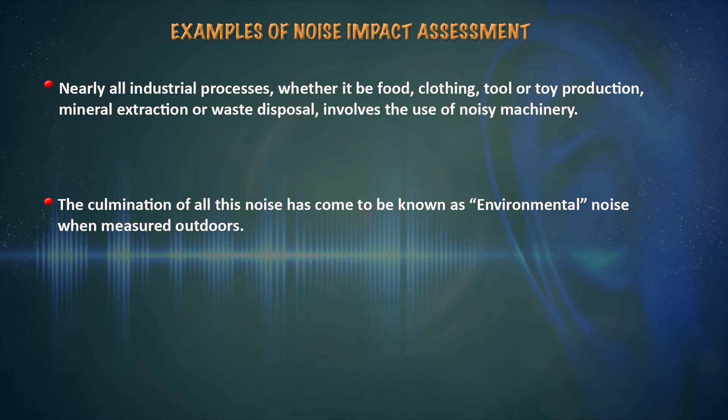Nearly all industrial processes, whether food, clothing, tool or toy production, mineral extraction, or waste disposal, can involve noisy machinery. So all this noise has come to be known as environmental noise, and this is measured outdoors. Indoors also, in the industrial sector, we can have indoor noise. By implication, noise is any sound that is created but is unwelcome; because music is soft to your ear, we cannot categorize that as noise.

Noise is something which is unpleasant to your ear and which is actually hampering your hearing. That could be a rock concert, a local factory, an airport, or a road, and all this has an impact and may need certain monitoring and control measures. This is basically the essence of noise impact assessment. Measurement of noise and noise units is normally done in any impact assessment study.

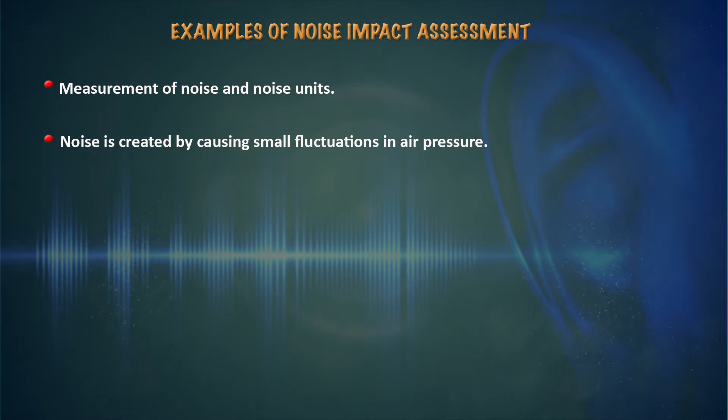Noise is created by small fluctuations in air pressure, and these fluctuations are generally caused by vibrating surfaces. An obvious and common example of this is a loudspeaker. This generates sound intentionally, and by these means, in political rallies, at Diwali time, even when people want to put something on sale, they use loudspeakers and go on the roads. I am specifically giving a context in our country, that is India.

So the level of these fluctuations can be large, because some of them may have very loud voices. They may be playing songs at very high levels, which can be damaging to the ears. And the elderly and young children are vulnerable because their eardrums would be affected.

This can cause instant hearing damage, which can be temporary or permanent. The human ear is a very sophisticated sensing instrument that allows us to hear all the sounds useful to us, but it can be damaged by very high sound levels.

A good quality noise impact assessment will determine the existing baseline noise at a proposed development site. If a new building is proposed, how do we estimate the impact of the noise it will create? First, you estimate the existing baseline noise at the site, then look at the technologies to be employed, and predict the level of impact the new proposal will have on the existing noise climate.

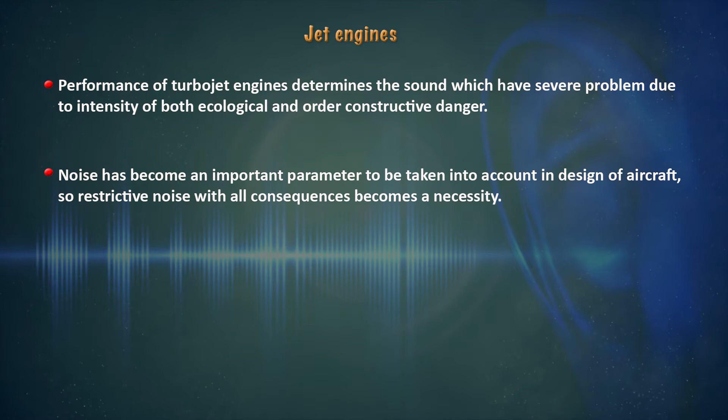For jet engines, the performance of a turbojet engine determines sound that poses a severe problem due to the intensity of both ecological and constructive dangers. Noise has become an important parameter to account for in aircraft design, so that they can be silenced to the extent possible, making restrictive noise control with all its consequences a necessity.

Aircraft noise from turbojet engines has major causes, including the mixing of exhaust gases with ambient air, pulsations in the fuel system that produce variation in blade output speed, density jumps during supersonic flight where airflow interacts with engine exhaust, turbulent jet flow generating noise, and blade vibrations causing disturbances in airflow and gas. In general, all types of noise created by aircraft are monitored so they can be silenced as much as possible.

The principle of operation depends on the chemical transformation of the potential energy of fuel into mechanical energy in aircraft engines. The operation consists of aspiration of atmospheric air through an intake device, compressing the air with a compressor, mixing air in a combustion chamber, expanding gases through the combustion turbine, and expanding gases in the outlet device.

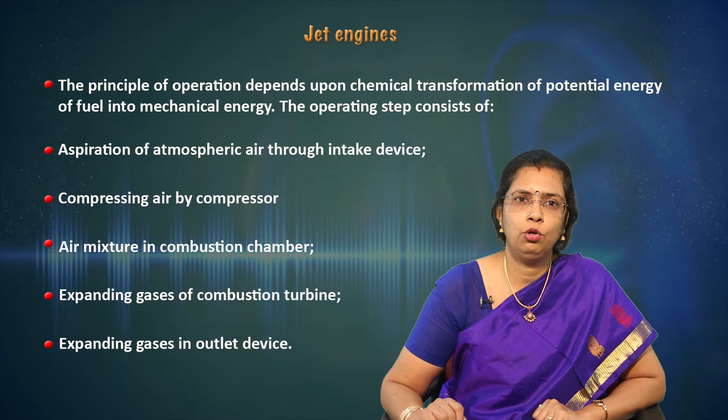All this will create noise in the process, noise in commercial and public buildings. Noise can be created by construction work and it can include demolition work, site preparation work, and building maintenance or repair.

You have often seen that when fixing pavement tiles, or the new type of granite or marble, when renovating buildings, houses or offices, the sound from the tile cutting machine is so shrill and annoying that it can actually cause damage. So the people cutting those tiles need to wear ear mufflers to protect their ears.

Then there is the operation of vehicles within or leaving the construction site. For example, to put the lintel or the ceiling of construction places, you require mixing machines where the cement, sand, gravel and all that is mixed equally, and then those machines lay that. So all this creates a lot of sound.

So the activities carried out near the immediate vicinity of the construction site, the citizens staying there, and those people executing the work at the site - all the impacts here have to be taken into account at the work site.

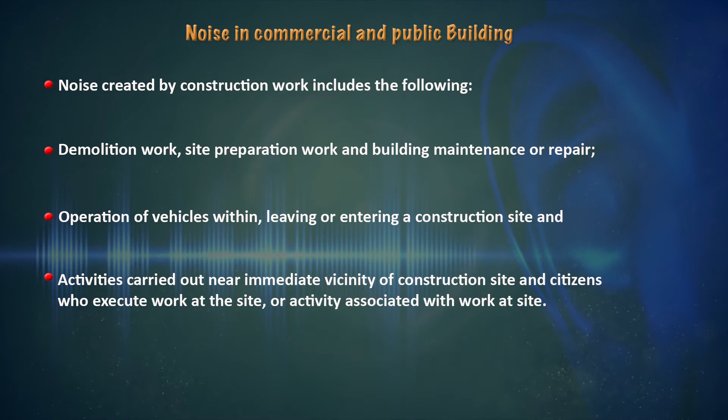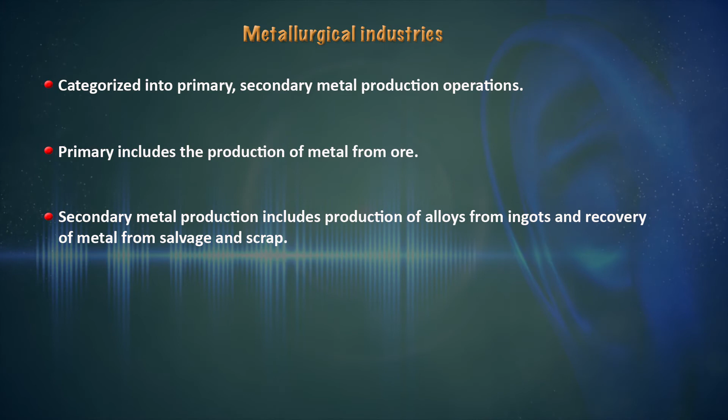In the same way, metallurgical industries and ceramic industries can be categorized as primary, secondary metal production processes. Primary means the production of metal from the ore. Secondary includes production of alloys from the ingots and recovery of metal from salvage and scrap.

Power system includes the vehicle and vehicle speed. Non-power system includes car horns, etc. So attenuation of noise in the industry is difficult because the machines and the enclosures are diverse in nature, and the acoustic characterization is not as simple as we think.

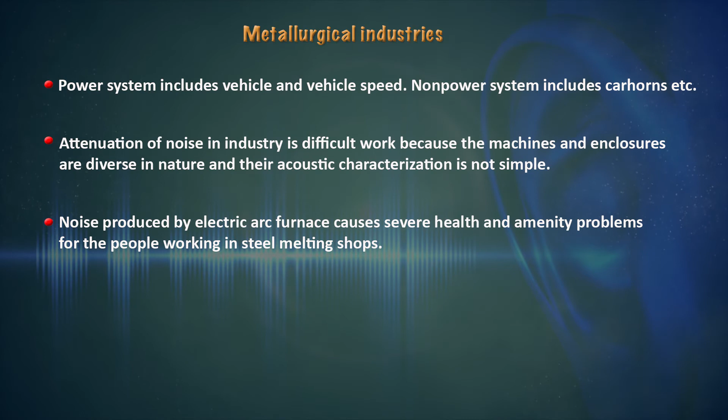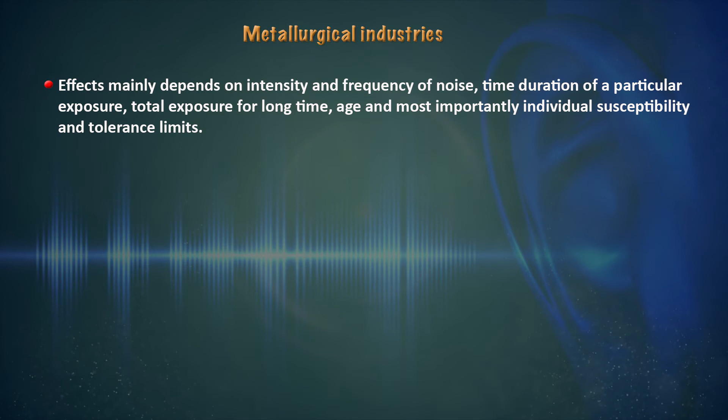Noise produced by electrical arc furnace also causes severe health and amenity problems for people working in steel melting shops. The effect of all this noise depends on the intensity, the frequency of the noise, the time and duration of exposure, the total exposure - how long you are exposed to it - the age of the person, and most importantly, the individual susceptibility and tolerance limits of a person.

Hearing impairment can be temporary or permanent, and it is due to the common physiological effect of noise. Let us now see the assessment of noise impact associated with the construction industry or construction purposes.

The main noise impact should be first identified. The baseline noise first has to be identified.

During the construction phase, when this project comes to you, you should see that the noise generated from construction activity - like the tile cutting machine, the lintel processing machines, the tractors, the buses or lorries bringing supplies, the loading and unloading of materials, power related mechanical equipment - all this has a potential to give adverse noise impacts to the surrounding sensitive receivers.

In the operational phase, the future noise environment will be affected by road traffic noise, rail noise, and fixed noise sources such as pumping station sources, the rail station and the ventilation system. So appropriate mitigation measures should be recommended wherever necessary in order to mitigate adverse impacts.

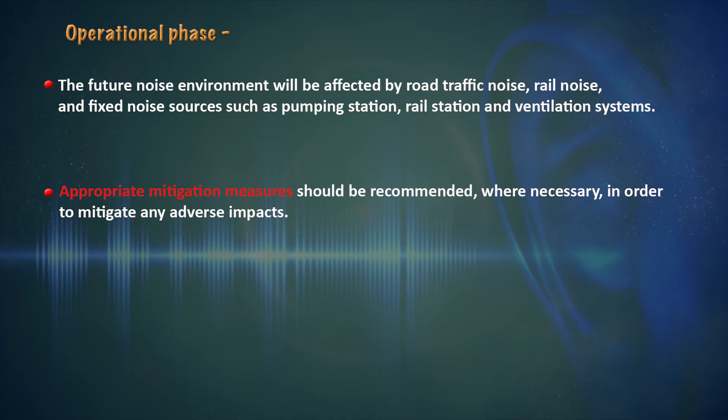The study area has to be assessed. For example, the assessment area has to be outlined - let us give 300 meters from the study area. This study area can also be reduced if there is a first layer of noise sensitive receiver closer from the boundary, and it can provide acoustic shielding to the receivers at further distance behind.

So you need to identify the noise assessment study area, then describe the noise environment. Major land uses close to the proposed development - are they residential, recreational, or educational institutions - then the existing noise in that area, is it dominated by traffic noise, industrial noise and so on. That is, what noise already exists there.

Then, after the current assessment, you see the construction noise which will be associated once you start it, and then the ambient noise level in that area, you need to calculate this. Noise assessment criteria - in this, the construction noise criteria need to be given.

The principal laws and guidelines on the control of construction noise should be taken into account, assessing the noise from construction activities during daytime. Details of the environmental legislation and standards for construction noise should be noted, including noise standards for general construction work during normal working hours.

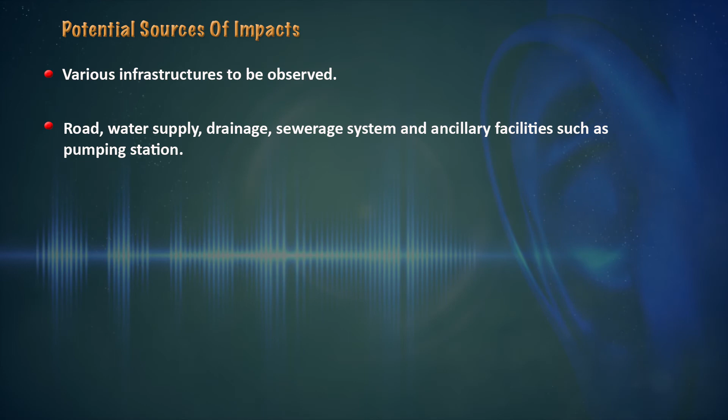Potential sources of the impact: you need to see the various infrastructure to be observed, such as roads, water supply, drainage, sewerage system, ancillary facilities, pumping stations. We need to indicate the likely noise impact.

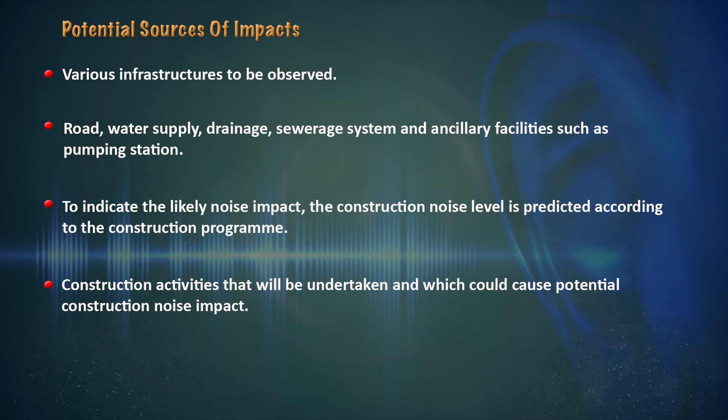The construction noise level is predicted according to the construction program. What type of construction activity is the project proposing? The construction activity that will be undertaken which can cause a potential construction noise impact will have to be identified, written down clearly, and we calculate the impact based on that.

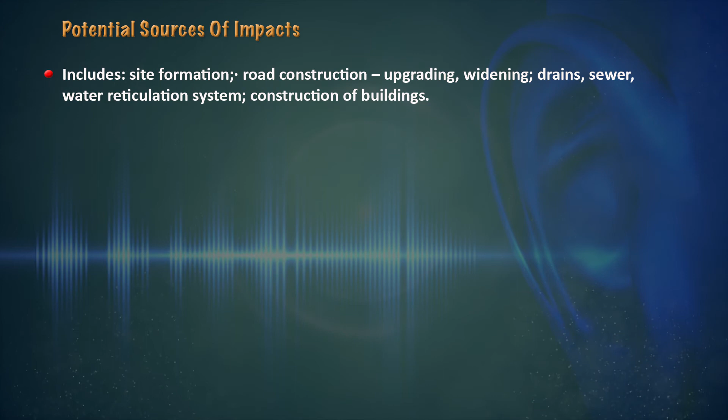That can include the site formation, road construction - which can involve upgrading, widening of the road, placing of drains, placing of sewers - water reticulation systems, and construction of buildings. So what type of activity is to be undertaken also needs to be assessed, because every activity will create a different type of noise level.

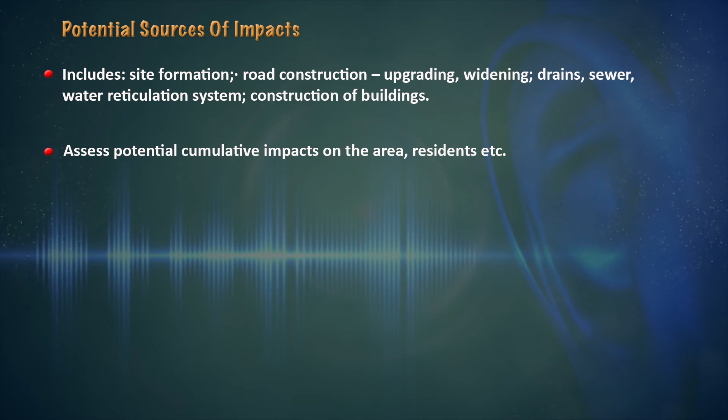Then assessing the potential cumulative impacts on the area and also on the residents who are residing in that area. Then the construction equipment - the type of the equipment, the quantity of the powered mechanical equipment.

Some of the equipment which we are using in our country may be very noisy and less costly, because we need to see which are the low cost effective solutions. But in developed countries, they may be using silencers and silenced mechanical equipment which do not create so much noise level problems.

Environmental engineers and trained personnel are required in order to design this project effectively, because they will give realistic and practical approaches in order to meet the construction program's objectives.

Construction schedule and the program: you need to see the number of hours proposed, the number of years that will take in order to complete the entire construction program, and the likely impacts that will be caused by the proposed project.

Assessment methodology and assumptions: this is conducted based on standard acoustic principles and it involves the following steps - identification of the most likely worst case scenario from the construction program, identification of noise source equipment, calculation of the total sound power level of equipment to be used, calculation of distance attenuation from work site noise source point, and comparison of the predicted noise levels with the relevant noise criteria.

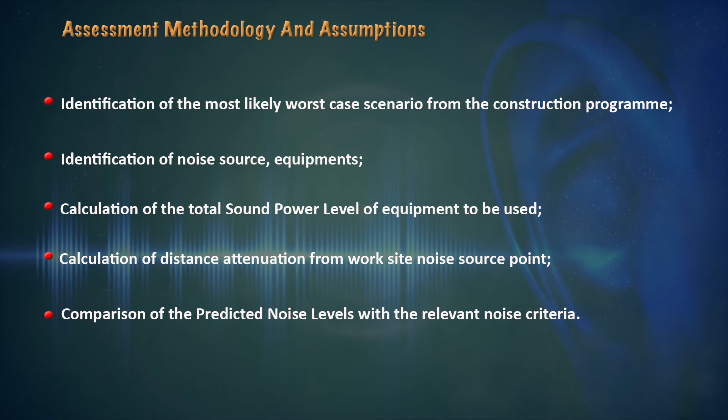Mitigation measures: after predicting the noise levels, you also have to check adverse daytime noise impacts. Then mitigation measures are required - for example, you can use quiet plant, where silenced equipment can provide significant reduction in the noise level.

Use of movable and mobile barriers: in order to temporarily relieve noise from that area, you can use certain screens around particular items of plant that create noisy operation.

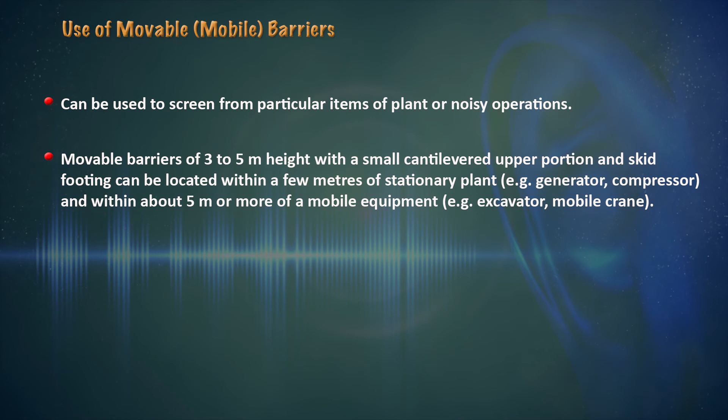Movable barriers of 3 to 5 meter height with a small cantilevered upper portion can be located a few meters from where generators and compressors give out a lot of sound. Even for larger mobile equipment like excavators and mobile cranes, if we can keep mobile barriers around them, there will be a temporary reduction of the sound.

The contractor should also provide purpose-built noise barriers and screens located close to the operating equipment. Certain types of stationary equipment like generators and compressors can be completely screened by the movable barrier, and it can reduce the noise by up to 10 decibels or more.

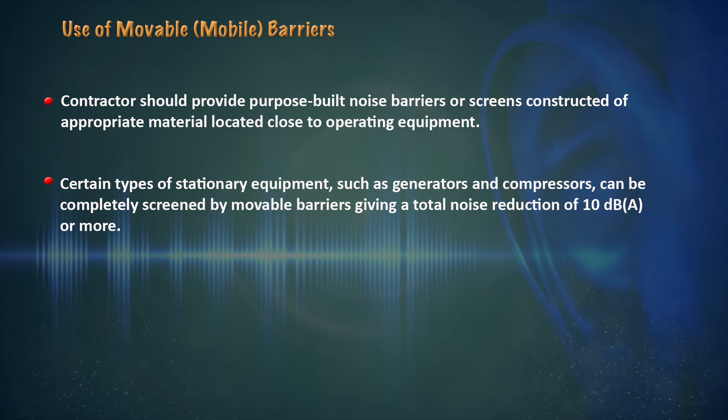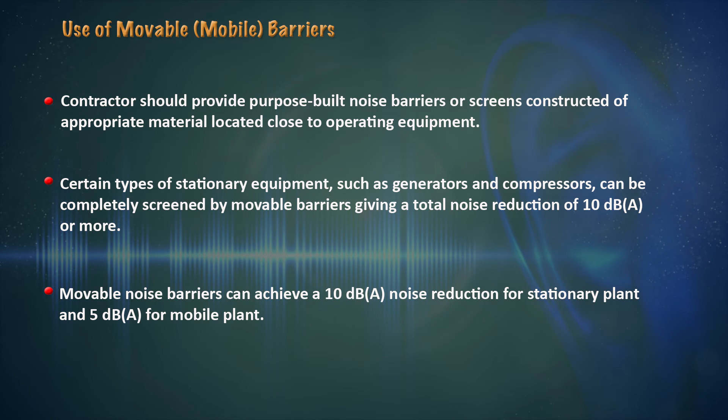Movable noise barriers can also achieve a substantial reduction in noise decibels for stationary plant and also for mobile plants. Noisy equipment should be sited by the contractor as far from close proximity sensitive receivers as practical, and prolonged operation close to residential areas should be avoided.

The contractor should minimize construction noise exposure to schools during exam time if construction is going to take place, and should contact school authorities to check the exam dates, because otherwise it will be very harassing and noisy for children taking their board exams or other half-yearly or yearly annual exams.

During the construction activity, the noisy activities can be reduced or minimized. Then noisy plant and processes should be replaced by the quieter alternatives wherever possible. Therefore, you can have silenced diesel and gasoline generators, power units, silenced and super silenced air compressors; they can be obtained. Then the noisy activities can be minimized.

For example, the noisy activities can be scheduled for the midday or at times which coincide with high background noise levels. Like peak traffic hours, when there is a lot of honking and a lot of noise, maybe we can keep the noisy activities during then, so that will merge with the background noise. Idle equipment: if you are not using an equipment for a long time, then you should turn it off or throttle it down, so that it is not giving a lot of noise.

And again, the power units of the non-electric stationary plant, the earth moving plant, should all be quietened by vibration isolation, partial or full acoustic enclosure, so that these noise generating components will give less sound. Construction plant should be properly maintained, that is, well greased, well oiled. The damaged and worn parts should also be promptly replaced and attended to. Then the equipment known to emit in one direction should be oriented so that the noise is directed away from the residential areas.

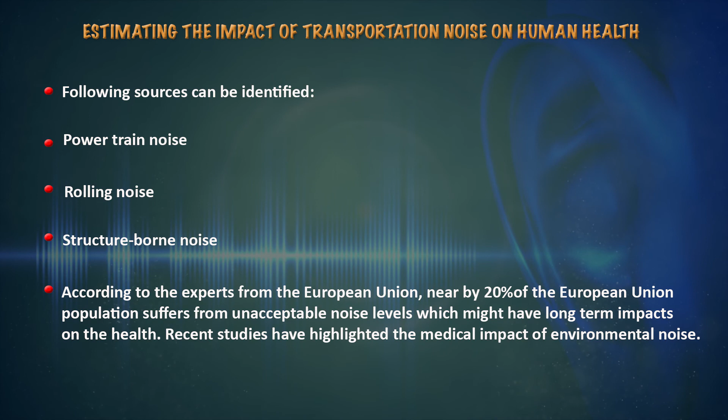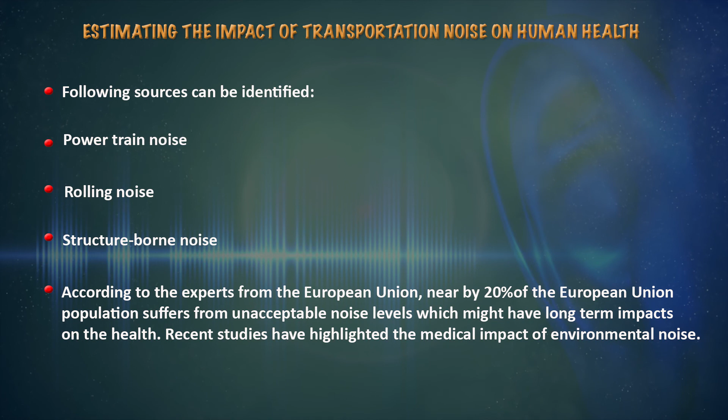So, the following sources can be identified: powertrain noise, rolling noise, structure borne noise, aerodynamic noise. And according to experts from the European Union, nearly 20% of the European population is suffering from unacceptable noise levels, which can have long-term impacts on health, and recent studies have highlighted the medical impact of environmental noise. So, you can see how important it is.

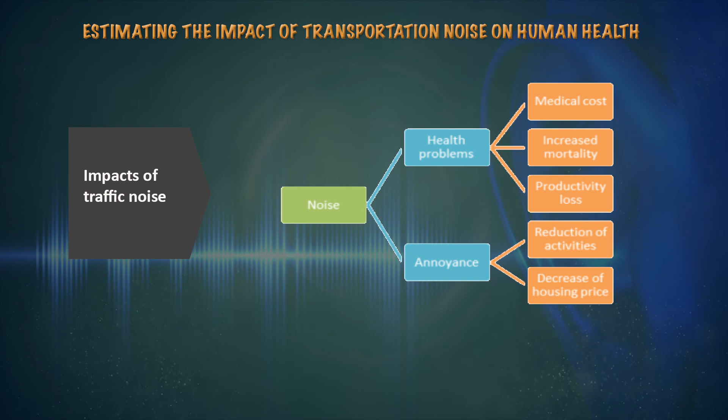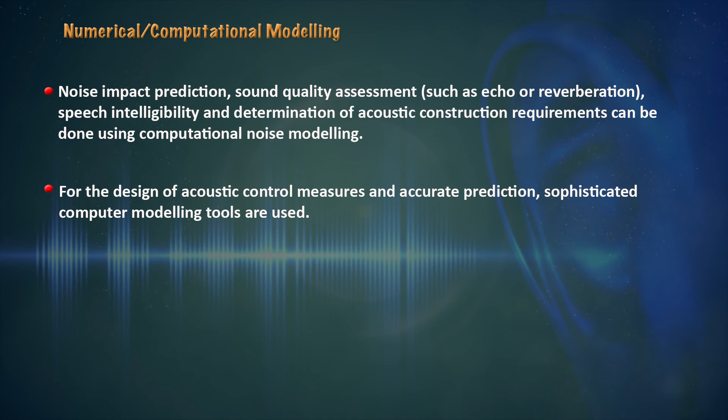Numerical and computational modeling can be done. So, noise impact prediction, sound quality assessment such as echo and reverberation, speech intelligibility and determination of acoustic construction requirements can be done using computational noise modeling. For the design of acoustic control measures and accurate prediction, sophisticated computer modeling tools can be used. A variety of acoustic software packages include Cadna/A and ENM for environmental and source noise prediction. So, like that, certain numerical and computational modelings exist in order to design for the environmental impact assessment of noise.

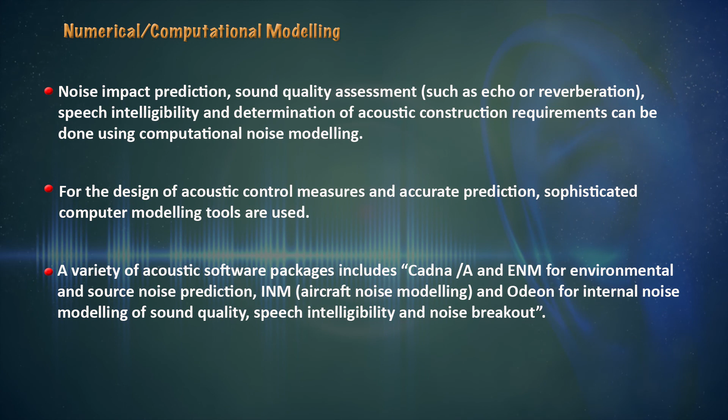Then there are instrumental methods like octave band analyzers, sound level meters, noise average meters, noise dosimeters, recorders, magnetic tape, cassette and pen, noise survey meters, acoustic calibrators, sound scope meters and statistical analyzers. All these are used to quantify and classify the physical properties of sound on the basis of physical parameters such as duration and amplitude.

So, dear learners and viewers, in this module we have discussed the different noise environmental impacts, and we have given certain examples as to how to analyze and predict the impact assessment of developmental projects. We have specially given importance to transportation noise and construction noise. So, like that there can be other types of noise also which you can analyze.

So, when you get certain projects and proposals, we need to analyze the background noise, the existing baseline noise, and the instruments or equipment that will be used for the construction activities and what type of noise they will generate. Then we can come to some theoretical conclusion and propose certain mitigation measures, or the type of instruments or gadgets, the silencers that can be used, in order to limit and minimize the noise that can be generated from these projects.